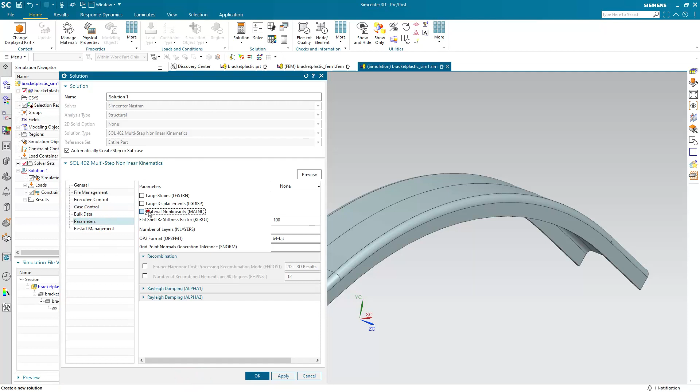Also, because we're going to be running material nonlinearity, we'll turn that on as well as our large strain. Finally we'll create a nonlinear static subcase where we'll specify an end time and number of increments that we'd like to run for our simulation.

Now we can prepare our geometry for meshing. I'm going to be using layers to manage visibility, so we'll put our solid bodies on layer 11. I'll go ahead and get an associative copy of the bracket first by wave linking it.

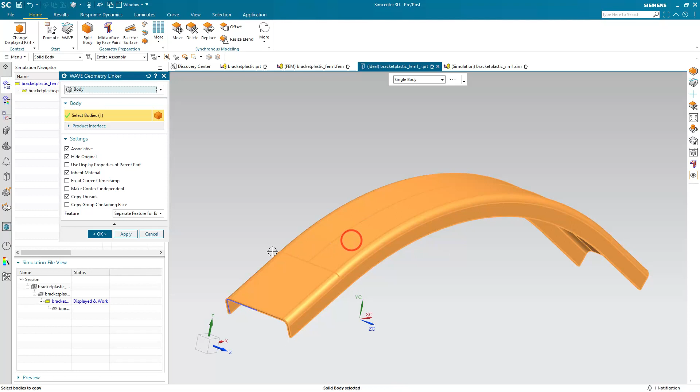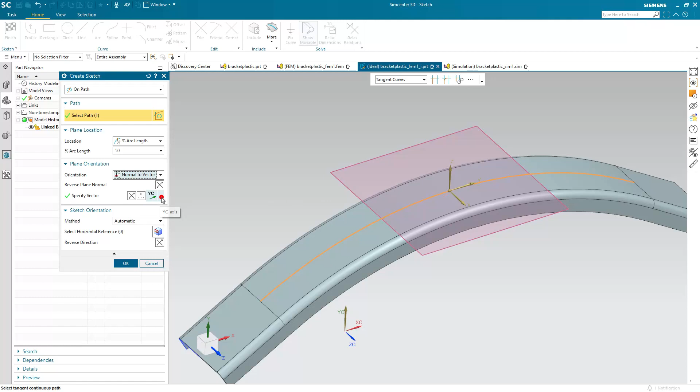Now before we mid-surface, I also want to create a ram that will be coming down and plastically deforming the bracket here. So we'll do that by creating a sketch to create our ram. Here I'll just specify the location and a vector, and I'll specify one normal to that surface at that point.

I'm just going to be creating a rectangular ram here, and we'll extrude it 2/10 of an inch up. So you can see it's just barely in contact with the bracket there.

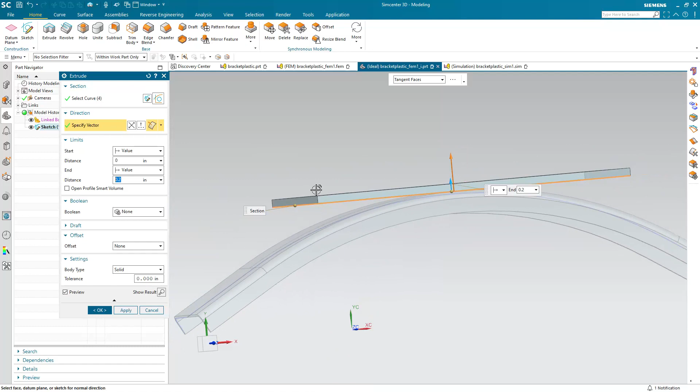Alright, so that's quite a bit thicker than our bracket, and that's as designed. We'd like it to not deform as much as the bracket.

Next we'll assign a material to the solid body. Now I already have a material specified for the bracket. It's a nonlinear material as well, and we'll take a look at that in just a moment.

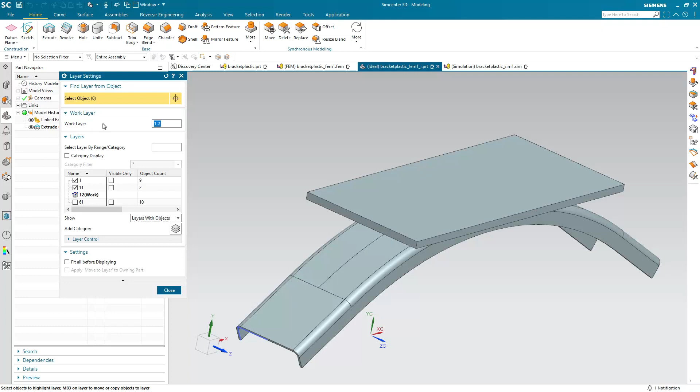But first we'll make our work layer 12, and we'll create our mid-surfaces so they'll be on layer 12. Alright, so that looks good.

So now we'll go to the FEM where we can create our mesh. We'll put our mesh on layer 12, which is where our mid-surface is. So I'll make that our work layer.

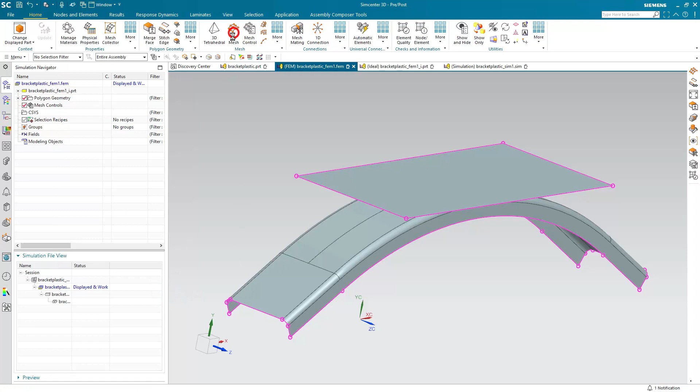And then we'll go ahead and create a CQUAD4 mesh with a global element size of 0.4. And I had attempt free mapped meshing on, so you can see we get a nice map mesh on our bracket and our ram.

Now, because we had assigned material to the CAD model, we can inherit that into the simulation model to reduce a potential source of error.

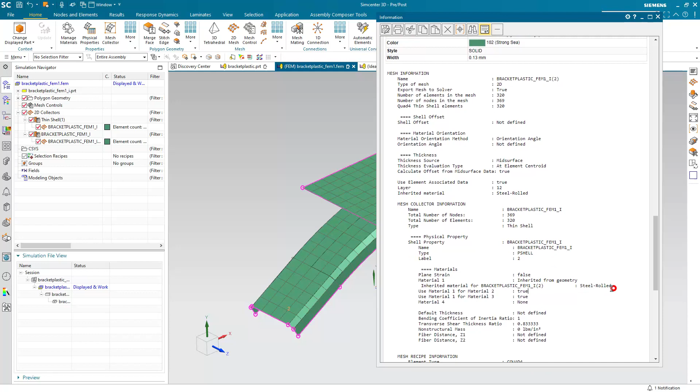And here we can check what material was applied from the CAD model by selecting information on the mesh, and here we can see not only the number of nodes and elements, but also the inherited material. So there we can see our 310 on our ram, and if we go down to the other mesh, we can see that steel rolled. And that's our nonlinear material that we had assigned to our bracket.

And if we'd like, we can take a look at that material. Let's go ahead and inspect it.

And what we'd like to look at is the stress strain curve that's assigned to that material. So here we can plot it. And there we can see our stress strain curve.

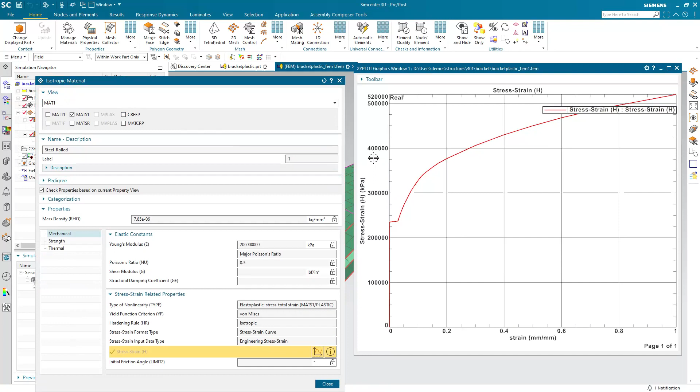If we'd like to take a closer look at the linear portion of it, we can zoom in on that. And there you can see the linear portion of the stress strain curve.

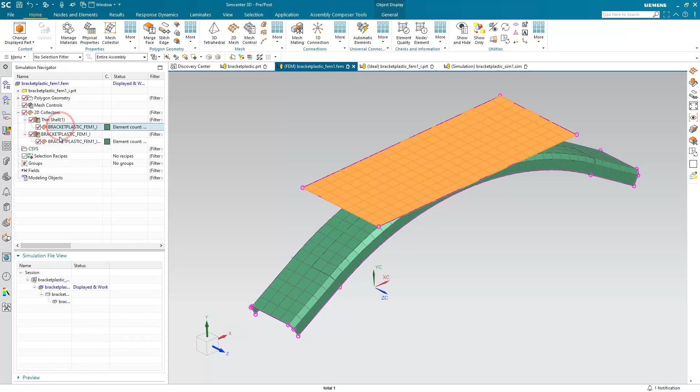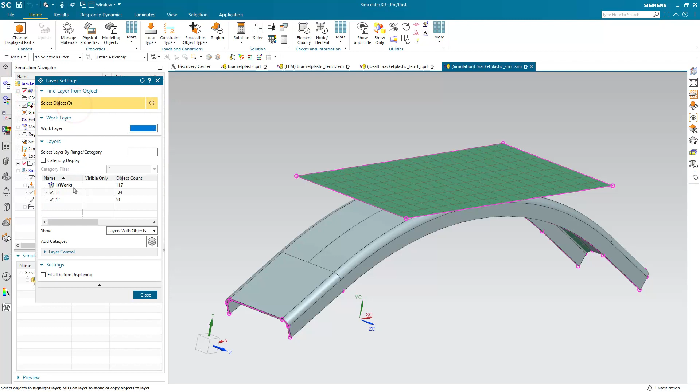That looks good. Let's go to our sim. Let's turn off all the layers except for 12, which has our mesh and our geometry on it. We'll make that our work layer and turn off everything else.

Then we can go ahead and put a fixed constraint on the ends of the bracket. Here I'll select polygon edge, and I can box select the ends. There's 5 edges on each end for a total of 10 objects.

Then we'll put an enforced displacement constraint on the vertices of our RAM. Here I'll select those 4 vertex points, and we're going to constrain it in all degrees of freedom except for DOF2, which is Y.

We'll put in a time-based field that will control our enforced displacement of those vertices. At time 0, it'll be at its original position of 0. We want it to move down 0.8 inches, so I'll put minus 0.8 at 1 second, and then have it come back up to its original position at 2 seconds, which was the total time we specified for our analysis in our subcase.

Lastly, we'll specify our surface-to-surface contact, and here I'll do that manually. You can automatically have it detect contact pairs based on a separation distance that it can search for pairs, but here we'll do it manually.

We'll select our top surface RAM as our source, and then a couple of faces on our bracket as our target region. Here we can put in a coefficient of static friction, as well as min and max search distances in case there's any initial penetration or gap.

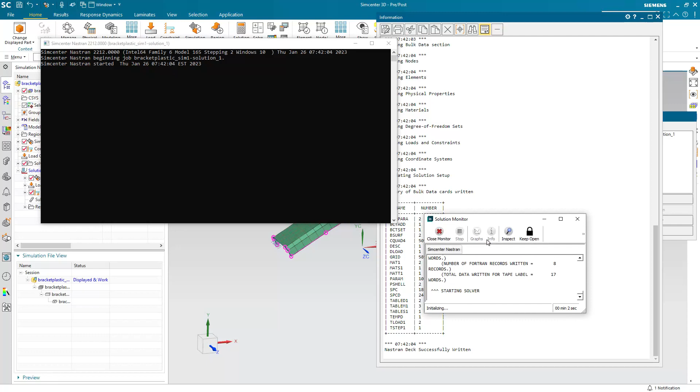Let's go ahead and run it, and we'll leave the video running during the solve. Normally I pause it, but here let's take a look at the solution monitor, because there are some nice features in the monitor that allow us to view the progress of the solution as it's solving.

Here we can view the displacement magnitude. We can see that RAM coming down, contacting the bracket, and the bracket deforming.

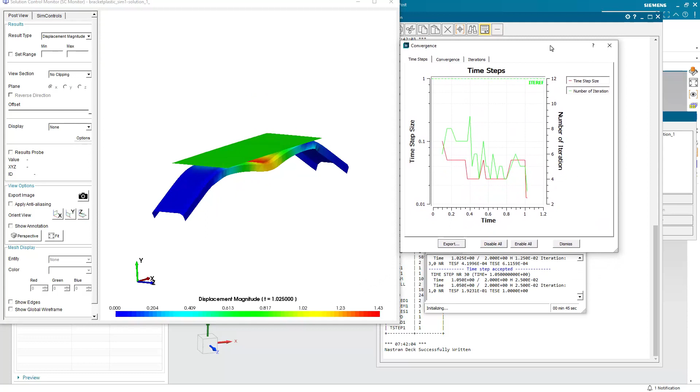We can also take a look at convergence plots. And it looks like it's done, and the preview looks good.

So let's go ahead and take a look at our results. Here you can see we have 20 increments for our nonlinear results.

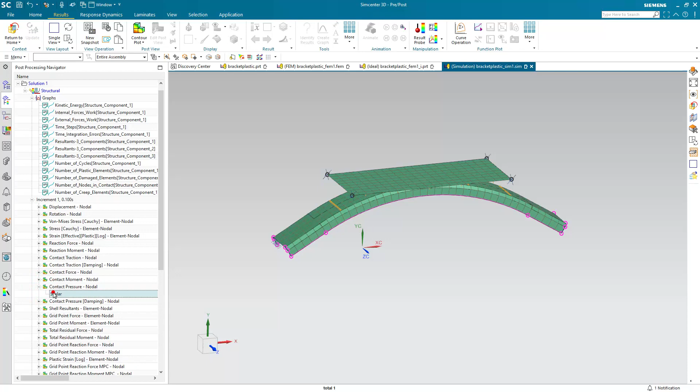We'd like to look at the contact pressure, and we'd like to look at a top and bottom view. So here, as I drag that in, I can select the top and bottom, and it puts the contact pressure in the bottom.

Then we'd like to put our plastic strain results. Here I want those effective plastic strain results up in the top.

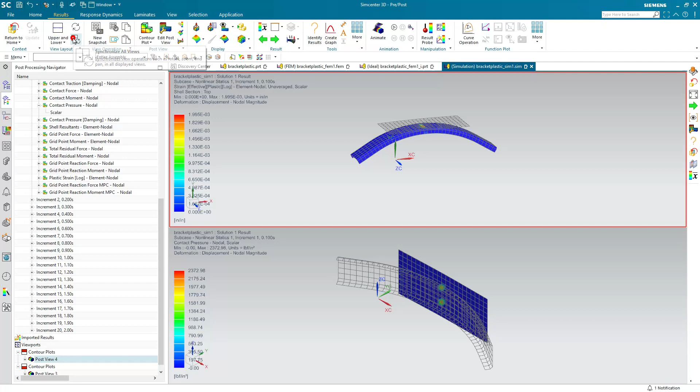Then I can synchronize the views, double click mouse button 1 in order to fit the view there, and then I can select both views and animate. We want to animate across iterations, so that way we can see all of the iterations.

As the RAM comes down, it plastically deforms the bracket. There you can see the plastic strain on the top as well as the contact pressure on the bottom.